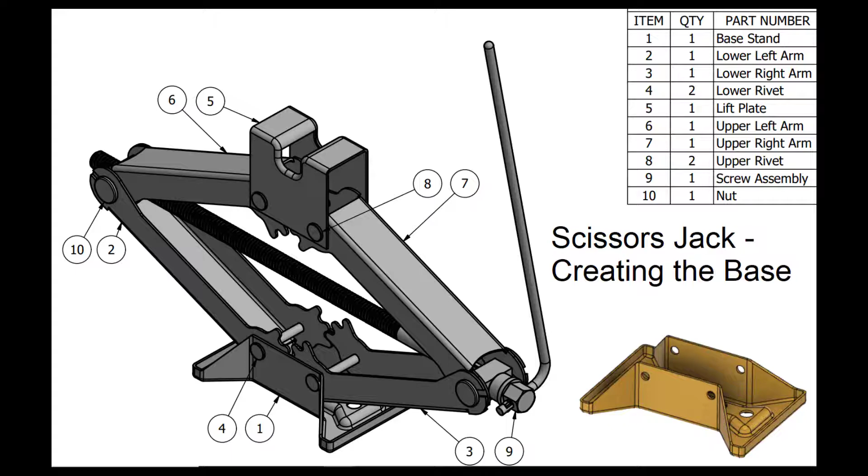In this lab, we'll design this scissors jack, and then we will analyze how much force is required to lift up a car with our hand at, say, this position or this position or this position.

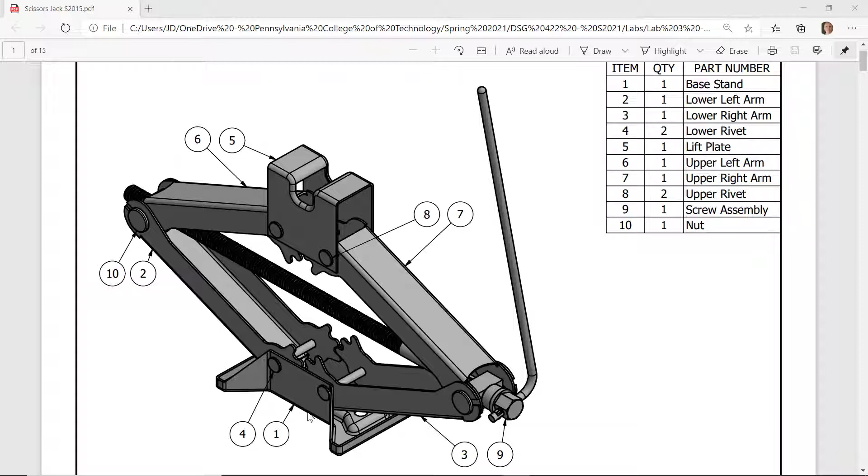The first part that we will model will be this base stand. Let's go down through the drawings and find that base stand. I see that the overall width, looking from the top, is 5 inches from here over to here, and the front to back from here to here is 3.5 inches. So let's start to set this up.

I'll go into Fusion, and the first thing I'm going to do is create a new folder, and I'm going to call that folder Scissors Jack. Then make sure that that is our active folder.

I have started a new file, and this one is also in inch units. Now, if the units bother you, it's really a good idea to become fluent in using any units. There may be some locations in the world where they never see inch units, but I tend to go back and forth between inch and metric units pretty fluently. So I'm going to change the units on this, and once we change the units, it's just the numbers anyway.

Be careful about your units. Now, you may also want to change the orientation of the Z-axis, particularly for 3D printing. I'm not sure what good a 3D printed scissors jack would do, but anyway, just to demonstrate, I'm going to go to this view cube on the front view, and I'm going to set that as the top view. Then I'll go around, so now Z is pointing up. It doesn't really matter, just a demonstration of how to do that.

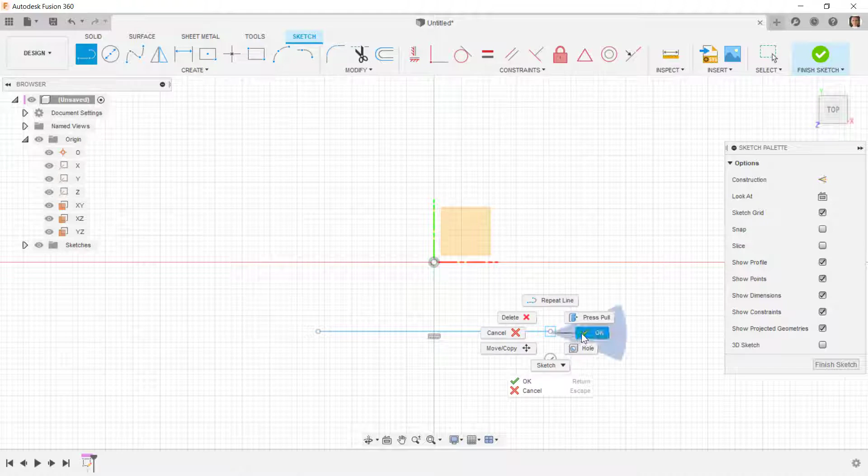I'm going to go to the top view, and I'll do a new sketch on this plane. I'm going to draw a couple of construction lines, and I'll put these in space initially. I'll change those to construction. Then I'm going to do a midpoint constraint between this line and the origin, and a midpoint between this line and the origin. So the first thing I do when I'm designing a new part is I try to find symmetry within that part.

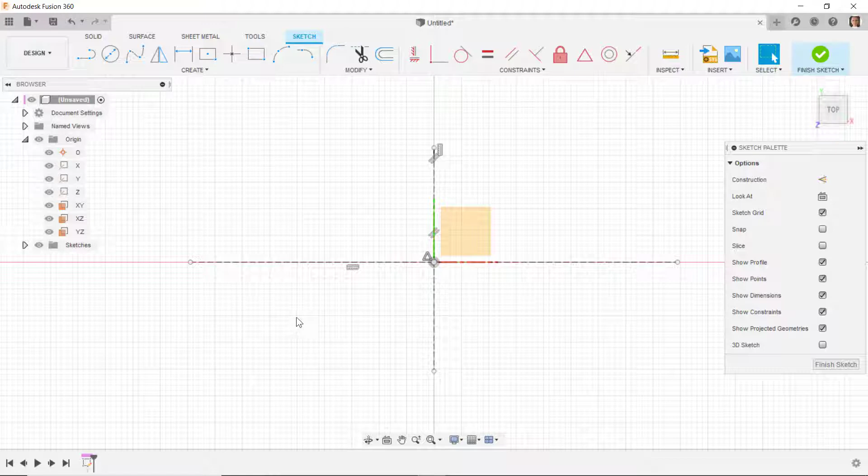There are a couple of different ways that we could have done this, this is just one way. I'm going to do a rectangle, and put this rectangle out in space, and I want all of that to be construction, or at least this line and this line to be construction as well.

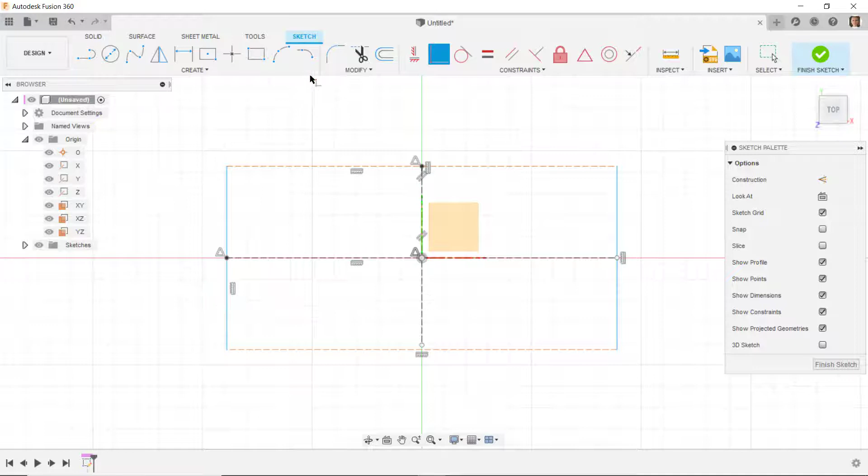I'll select those and hit X on the keyboard, and then I'm going to do coincident - this point, and then the midpoint of that line, and coincident this point to the midpoint of this line. I'll put in those two overall dimensions that we looked at, so this distance is 5, and this distance from here to here is 3.5.

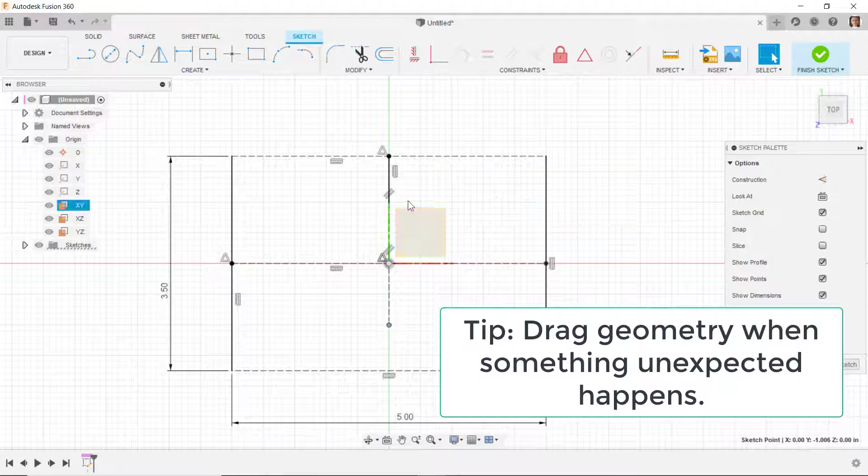I see that this point is unconstrained, so I'll get this point to this line, and it actually doesn't want me to do that. I'll just try to - and I probably accidentally got 2 lines in here, so be careful about that. I have an extra line that I had somehow gotten into my sketch.

I'll put a link to the drawings, and try to go by the drawings to model this on your own, and then go back and look at how I did it. So I did 5 inches this way, 3.5 inches this way.

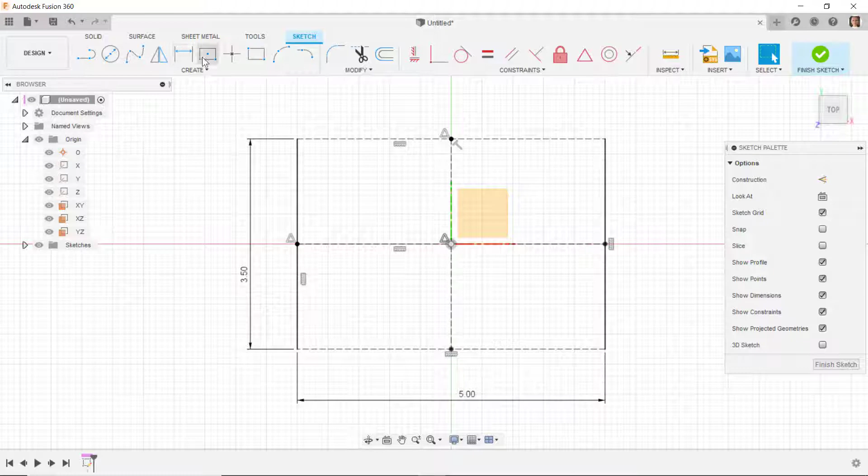I think what I'll do is put a rectangle here in the middle, and I could use a center point rectangle, but I'm going to do it this way, and I might purposely offset the center of that. I'll do coincident between this line and the midpoint of this line, and coincident between this line and the midpoint of that line. I'm looking for symmetry within my model, and I'll change this to construction, and this to construction.

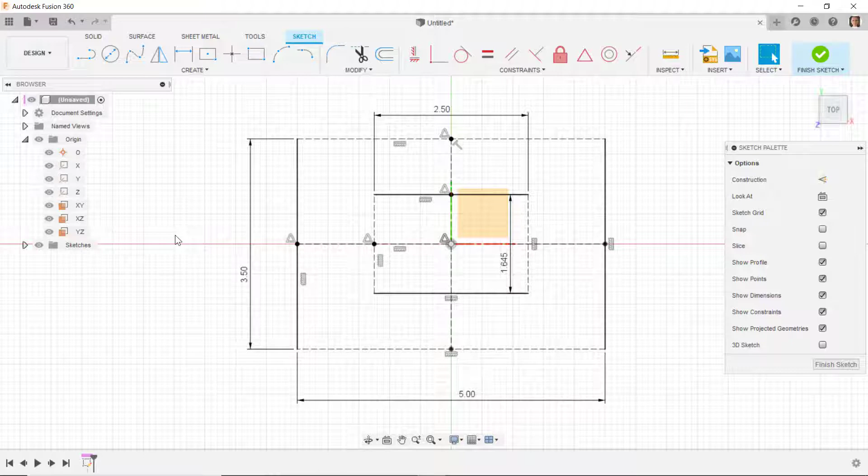I'm then going to create a line, and I'm trying to decide how I want to do this, but I'm going to create a line from here and then from here to here, and I'll also do it down here and then from here to here. We could mirror these from this side to this side and to the other side, so let's do that instead.

Let's go ahead and put a dimension on here. I'll dimension the distance from here to here as 0.375. We see that that geometry is fully defined, and so then we can just do a mirror of this line. I might have trouble getting the shorter line.

So if I do a long left click, then I get a select other, and I can select this second line, and then the mirror line is about this line. Okay, so now I have that constrained.

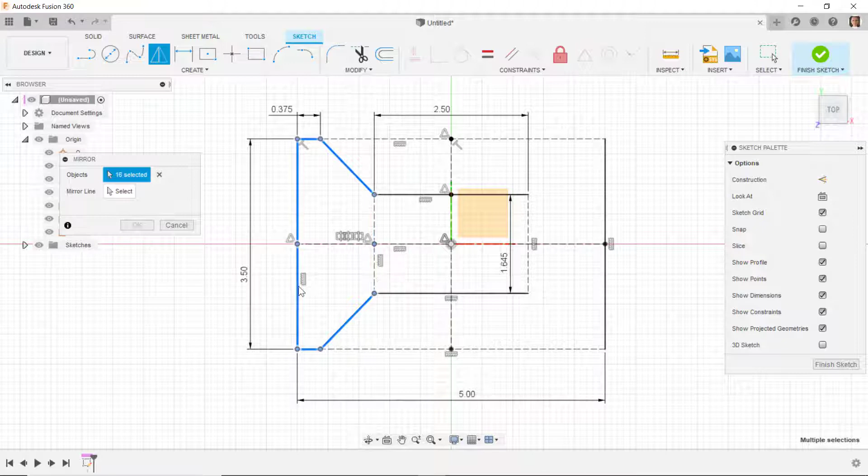I'll do create mirror. Now I might put a window around this, but that would also get this line and this line, which I don't want to duplicate. So I'll hold down the control key and unselect these two lines so that it doesn't mirror those, and I'll mirror that to the other side. So be careful about avoiding the duplication of geometry.

Alright, I'm going to finish this sketch, and I'm going to rotate around a bit, and then I want to do a sketch on this face. So I'll do a sketch and I'll do it on that face.

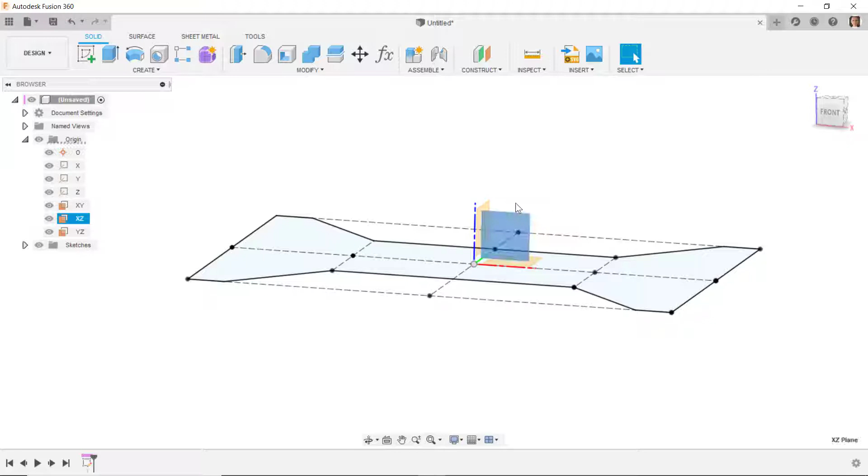Now there's a setting somewhere in your preferences to keep it from rotating around. I prefer to work in 3D, so I don't want this rotating around looking directly at that plane. Some people prefer though that it rotates around. You can set that in your preferences. I don't remember where it is exactly, but somewhere in there in your preferences.

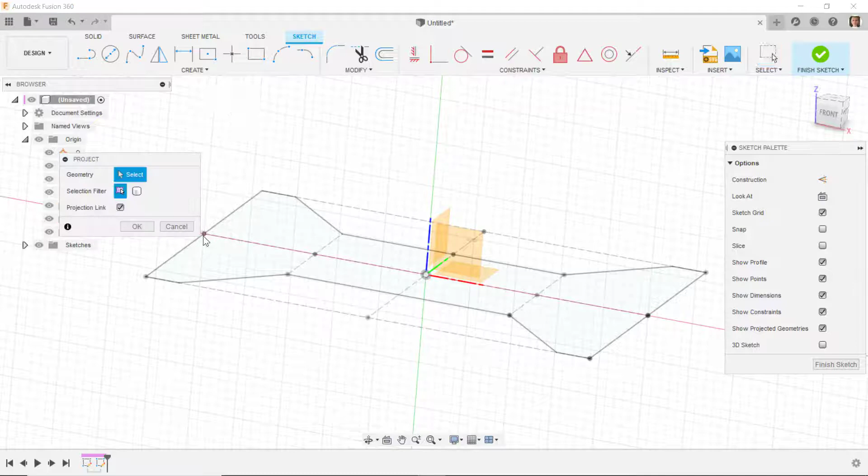So I'll do P for project, and I'll get this point, and I'll get this point, and I'll say OK to that. I'm going to temporarily hide sketch number 1, and I will draw a 2-point rectangle from this corner over to about here, and then I'll drag it to that corner, so that length is fully defined.

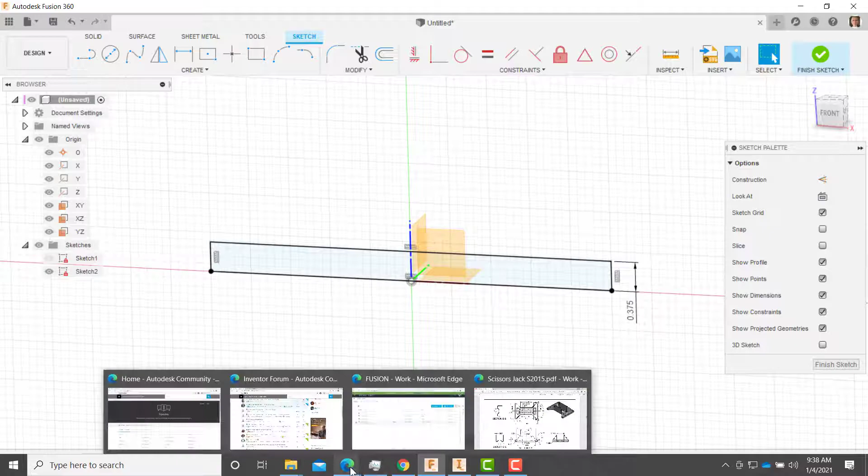And then I'll dimension the height of this as 0.375, and follow along on the drawings to see where I'm getting this dimension. So here's a 0.375, and I'll put in these other sketch elements.

One thing that people will ask me is they'll say, just give me the model. I want the model to do the analysis. But I find that a lot of people don't really know how to model, and so I want to make sure that we know how to model geometry. The analysis doesn't really mean a whole lot if we can't model the geometry.

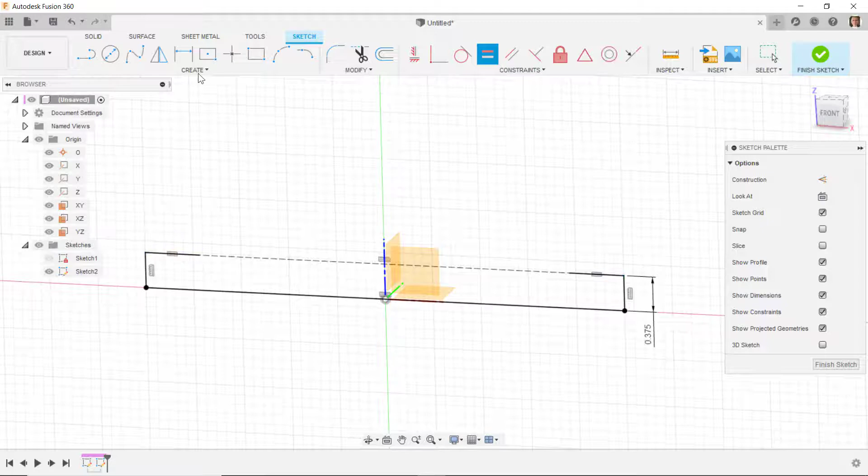I will then draw a line from here over to here, and I'll do the same thing from here over to here, and I'll make these two lines equal. Again, I have trouble getting those two lines, and if I do a long left click, I can then get the select other, that line and this line. I want those to be equal, and I'll dimension this distance from here to here as 4.25.

I'm going to put a vertical line here, and I'll change that to construction, so X on the keyboard, and I'll put a horizontal line above this vertical line. I see a lot of people will make this as two separate lines. If you have a continuous line, make it as one piece of geometry.

And I'll do coincident this point to shift the midpoint of this line, and I will dimension the length of this line as 2.5, and I'll dimension the height from here to the base, and that distance is 1.5.

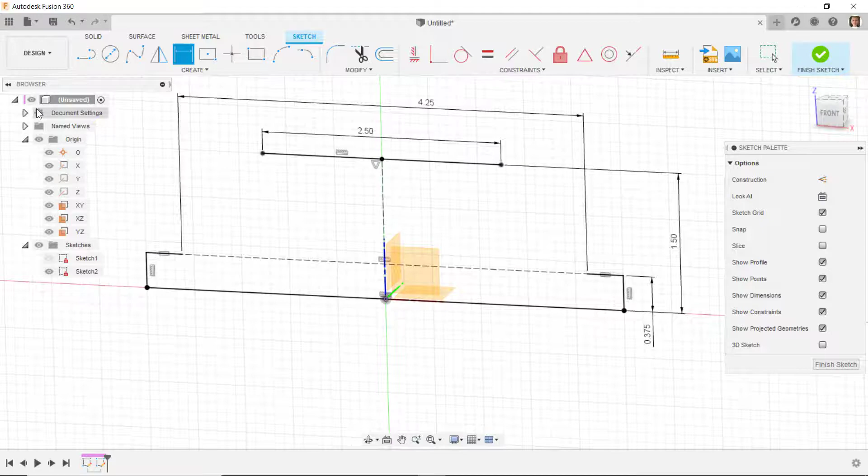So that geometry is black. And then I will draw a line from here to here, and that geometry is black. From here to here, that geometry is fully defined.

Now I could leave this sketch as it is, but I want to go ahead and put a couple of circles in here for some holes. So I'm going to draw a line, and initially I'll just put it out here in space. I'll draw a circle at each end of this line.

I'll do equal, this circle is equal to this circle. I'll dimension one of these circles as 0.25, and I'll dimension the distance between centers as 2.

And I'm going to change this line to construction, and then I want the midpoint of this line somewhere on this line. So I'll do coincident. I'll select this line, I'll hold down the shift key, I'll get the midpoint of this line. So that centers that. And then I'll drag this up, and I'll put my height of where I want this.

And so let's dimension from this line down to this line, and let's do that a distance of 1.125. Now actually I try to, when I put in or follow along on something like this, I put the dimensions in the same location that they're on the drawing.

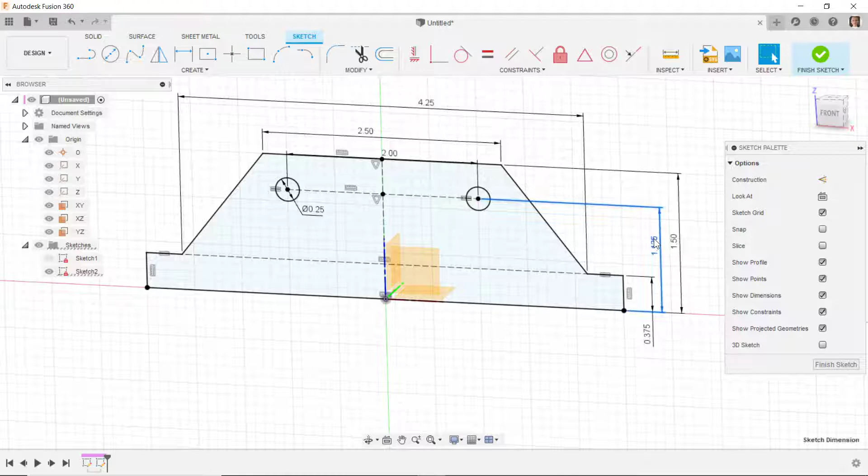So that students can follow me carefully. And so I'm going to put that over on the other side. Actually, let's just do, it'll give it a different D number, variable number, if I don't undo that. So I'll undo that, and 1.125. And so we see that that is fully defined.

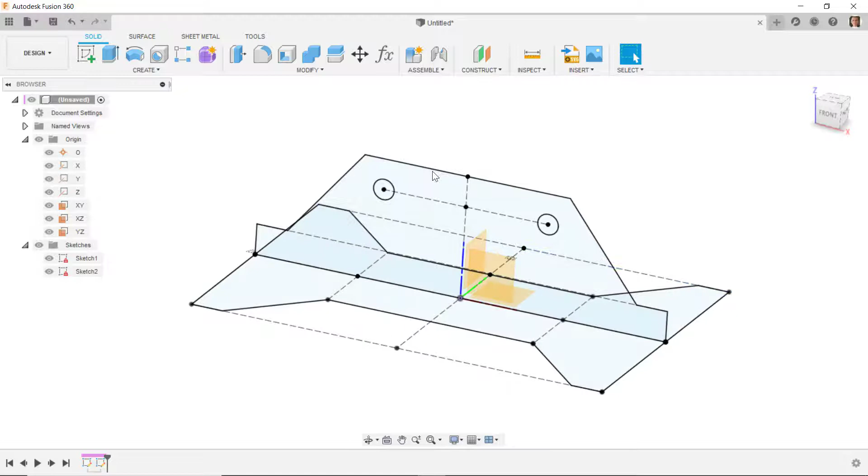Alright, I'll turn on the visibility of sketch number 1. I'm going to extrude this sketch up to the top of this sketch. So I'll do extrude, I'll select this, and I'll tell it to go to object, and I'll select the top of this. So I have that first extrusion, make that sketch visible again, and I'll do extrude.

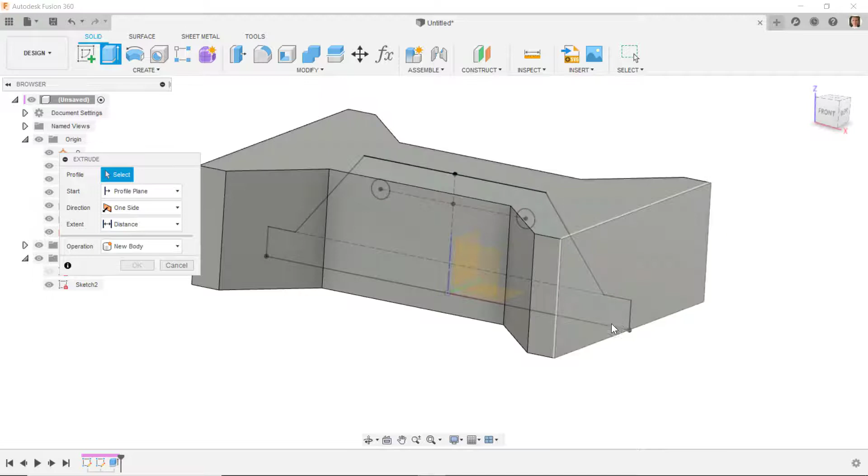You may have trouble getting that sketch down inside here. If you do that long left click, you can then get that profile. And I'm going to tell it to go symmetric through all, and I'll tell it I want the intersection between those two, so we'll say OK to that, and I'll hide that sketch.

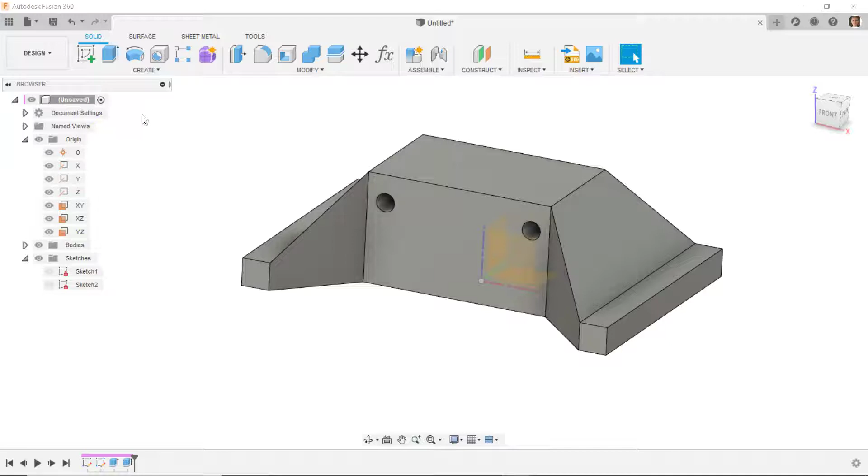Now I've gone entirely too long without saving this, so let's go ahead and save this, and I'll call this scissors jack.

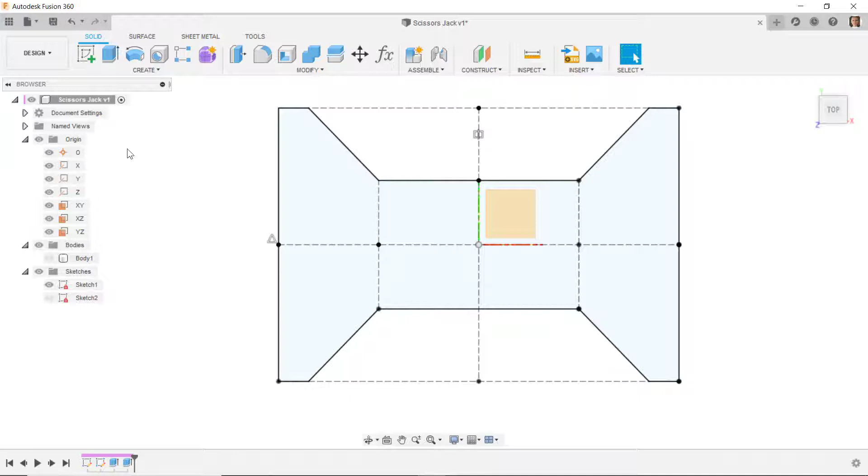I'm going to go to the top view, and I am really irritated with myself that I didn't create this as a new component to start with, but we will convert this body to a new component. I'm going to hide that body for a moment, turn on the visibility of sketch number 1, and create a new sketch on the XY plane, then project geometry for this center line and this center line.

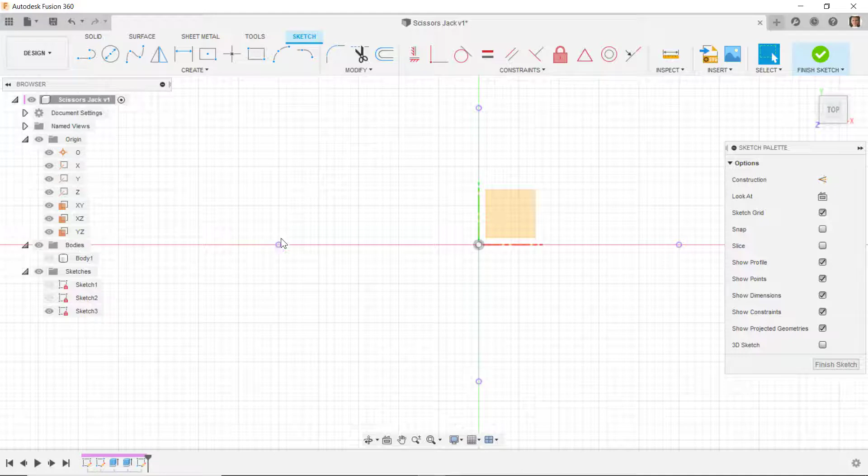I'll hide sketch 1. I prefer to change these to construction, but it's not critical. Then I'm going to draw a rectangle and put it about like this. Again, I could have used a center point rectangle. I'm going to make this line coincident to shift the midpoint of this line, and coincident this line to shift the midpoint of this line.

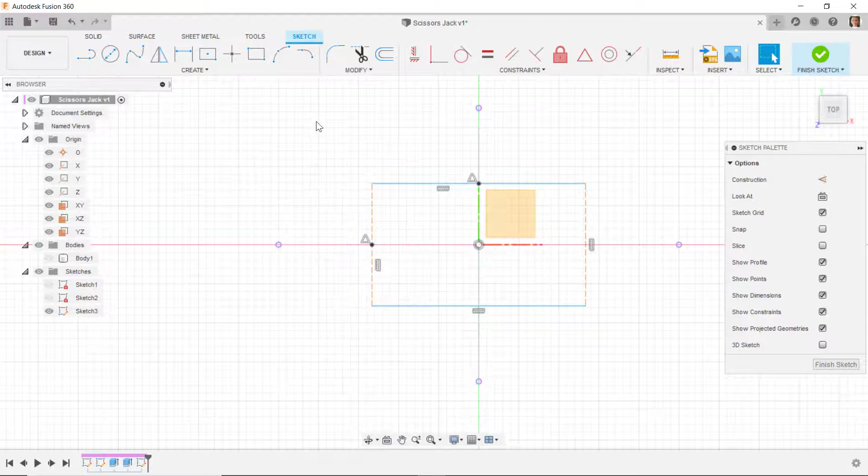I'll change these two vertical lines to construction, then draw a line over on this side, 1.05 in height, somewhere on this line. I'll do coincident to shift the midpoint of this line, and mirror that to the other side of this construction line. I'll dimension the overall distance from here to here as 4 inches.

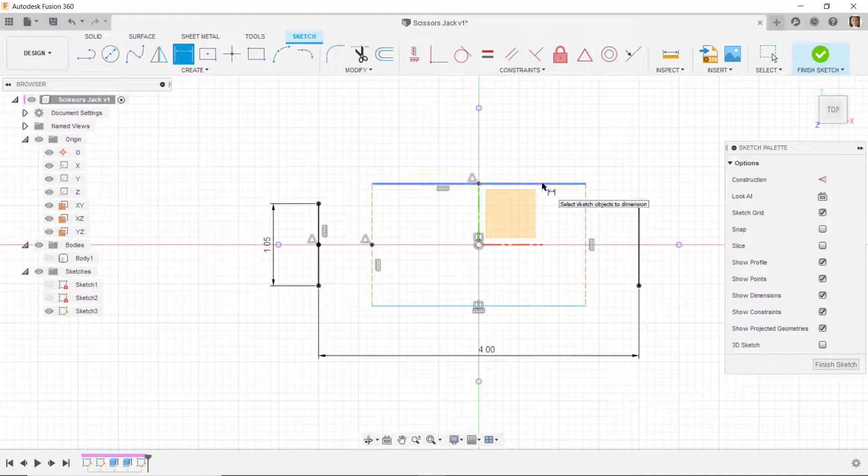When we do that, we see that these two lines are fully defined - they turn black. I'll dimension the distance from here to here as 0.75. Then I'm going to draw a line from here to here and from here to here.

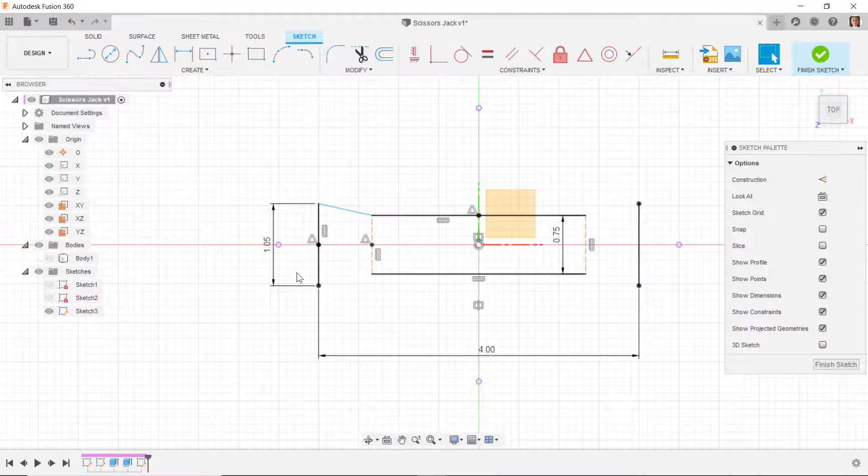We have to be careful that these lines do not become perpendicular to each other. I could do just one side and mirror it to the other, or just go ahead - I'm not sure which way is faster. It's probably just as fast to do this as to mirror. The advantage of mirroring is it ensures equal length, but because we did this symmetric here, even if I drag this, they stay symmetrical about this center line, so that works out okay for us.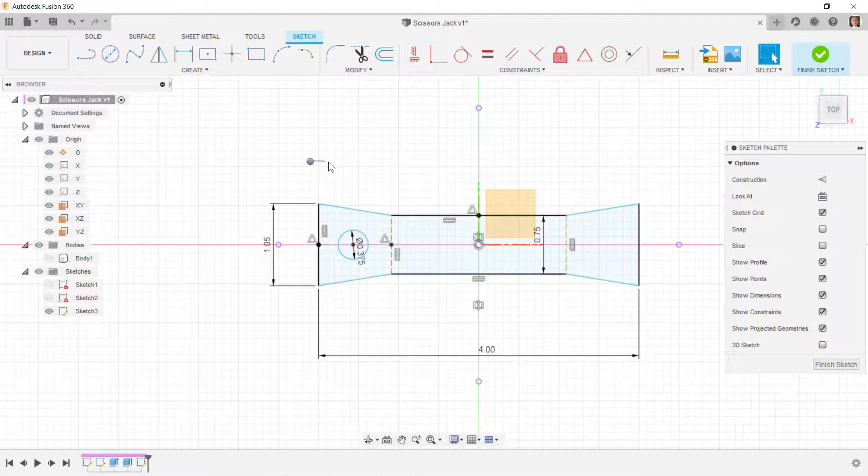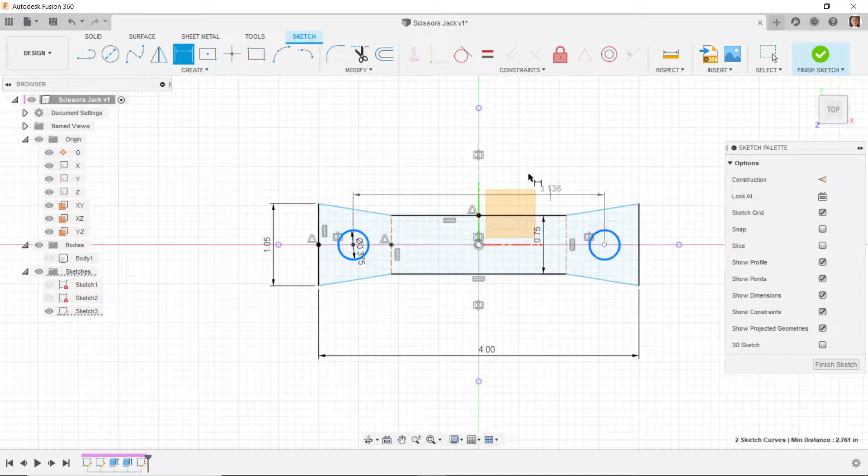Then I'm going to draw a circle somewhere on this line, as 0.375, and mirror this one to the other side. I have a mirror command up here since I use it quite a bit. I'll select this circle and mirror it to the other side of the line of symmetry, then dimension the distance from this circle to this circle as 3.25. Refer to the drawing to see where I am getting these dimensions from.

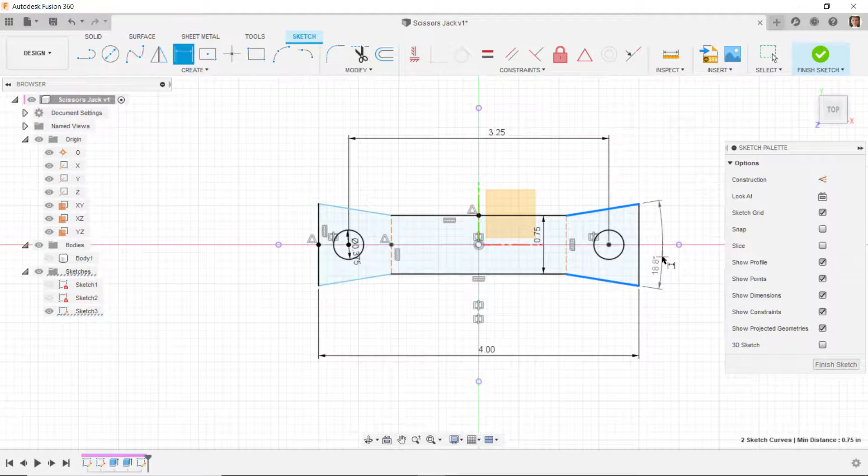Now I just realized I had put the wrong dimension over here on this line, so I'm going to delete that dimension. Where I wanted that dimension is from here to here, and I need to put an angle between this line and this line of 62 degrees. Refer to the drawing as I sketch out this geometry - you should have right away been hitting your keyboard, hollering at me, telling me I'm doing it wrong, loud enough that I could hear you from wherever you are in the world.

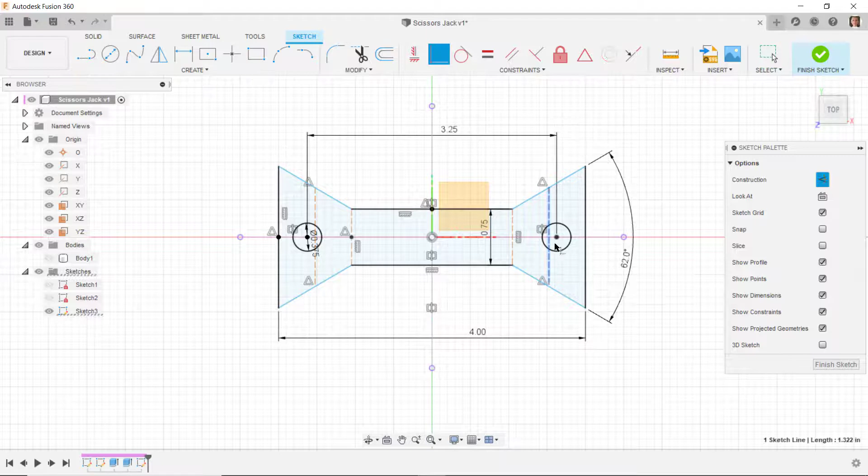I'm going to draw a line - I don't necessarily need this line, but I'll put it in for visual purposes - from the midpoint of this to the midpoint of this line. I'll do the same thing over here, although I don't really need it in two places. I'm going to change those two lines to construction lines by selecting them and hitting X, then make one of these lines coincident to the center of one of these holes.

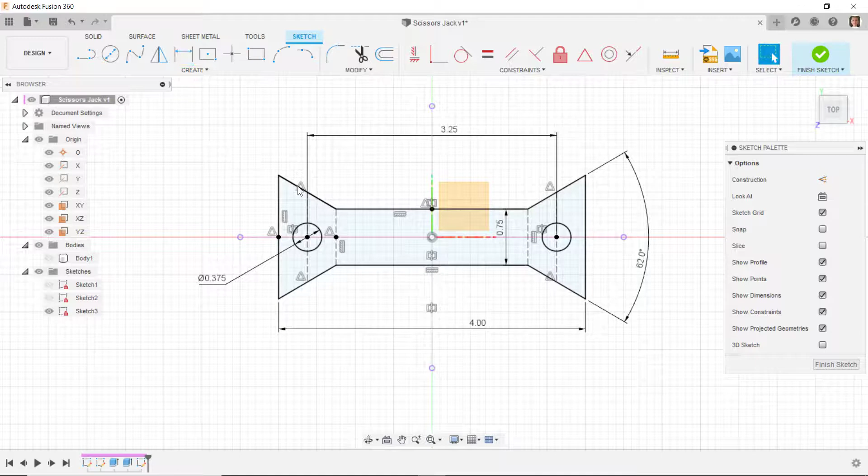When I do that, all of this geometry turns black, and I don't even have a dimension from here to here. If I dimension that line and see what it is, it comes in a different dimension than what I have on my drawing. So I need to figure out what is different compared to my original. I'll assume I don't want it at the midpoints of these two lines - I hit the wrong one, I want it on the angled lines. So I'll delete those midpoint constraints. These are the kinds of mistakes you might make as you're modeling something, and you don't have to start over - you can just edit what you have and fix the mistake.

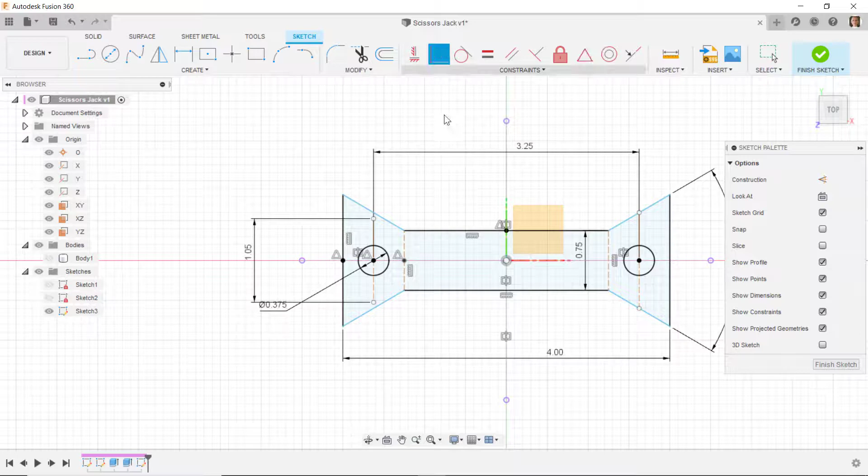So I'll do 1.05, and then I see that I have white dots here, so when I remove those midpoints it didn't retain the coincidence. So I'll do midpoint this line to that point, and then I'll do coincident this point to this line, and this point to this line. Now we see that it all turns black, except that I still have some unconstrained geometry over here.

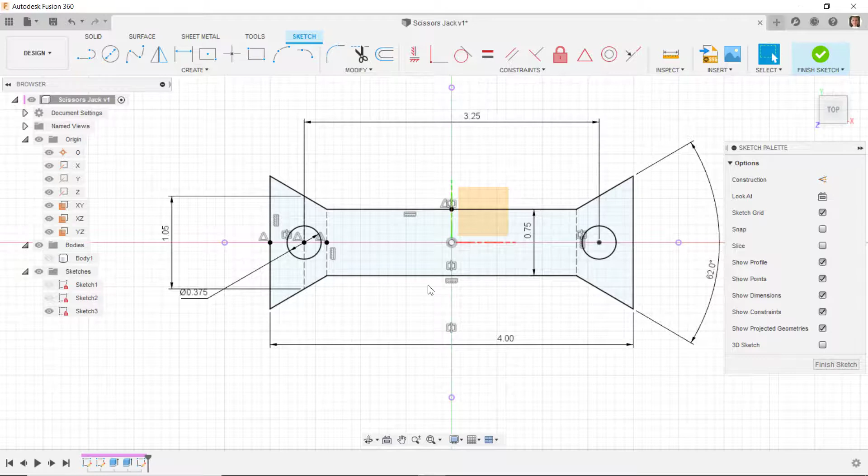So let's make sure we get rid of these white dots. Everything is not fully constrained, and this line is not constrained somewhere, so we need to put a vertical constraint on that line. So we drag the geometry and see where it is not fully constrained. Again, I said we didn't really need this line - see, this was already fully constrained before I put that constraint on that line, so we didn't really need it.

With our symmetry, everything is fully defined. I'll turn the visibility of the body back on again, and I'm going to do an extrude, and I want to get the whole area too, so I'll get all three of those areas. For the distance, I'm going to go 0.25 and make sure that it's on cut, and so we cut this cavity down into here.

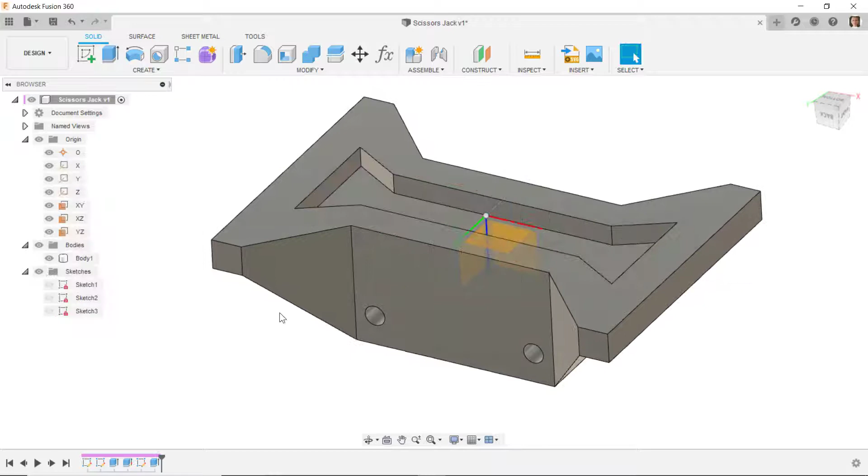I'll turn off this origin geometry for a few minutes, and then I'm going to do a fillet in all of the vertical edges of 0.125. I'm going to see if I can select this and get them all at the same time. So I'll go to fillets, go to my selection filters, do select edge priority, and then do a crossing window across here, and that got only the vertical edges.

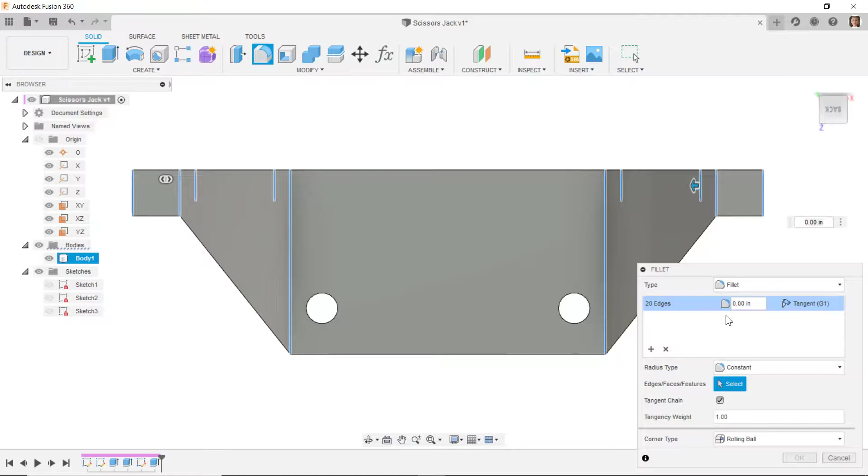Now I avoided this edge, so that's why I made my window fairly narrow up here to avoid this edge along the bottom of this slot, and I'll change that to 0.125. Now if you have trouble doing that, you can just go around and select each one of those edges manually.

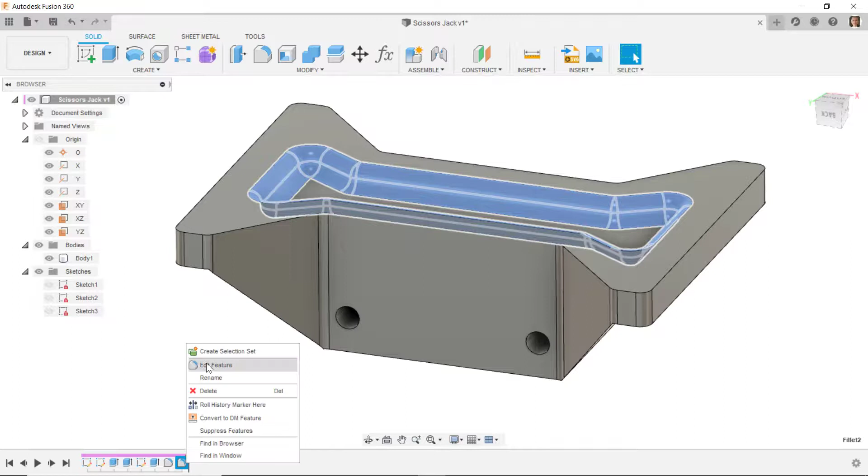I'm then going to do another fillet, and I'll select this loop and this loop of edges, and I'll do those as 0.125. I'll go back and edit this previous fillet, and I'll get this loop of edges. So I'll hold down the control key and add this loop group of edges to the fillet selection, and I'll also hold down control and get this edge and this edge right here, so we've added those fillets.

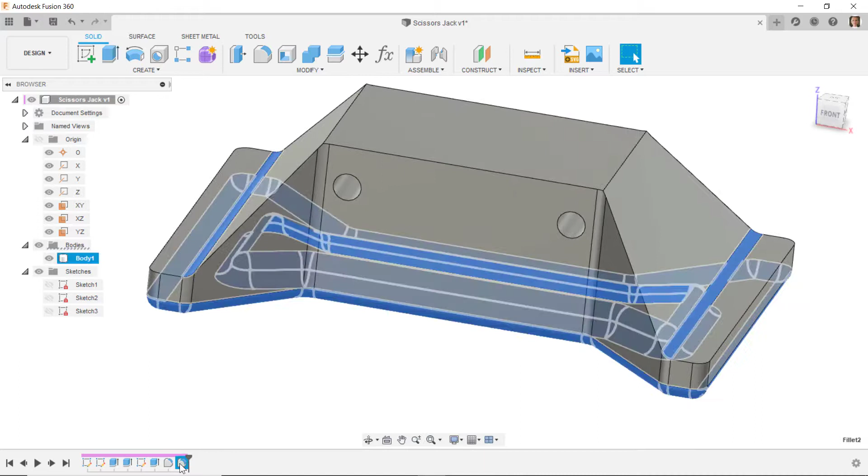Now I'd also like to fillet this edge and this edge up here. I've had trouble in the past if I add those two fillets now, so we could give it a try - it may or may not work. If it doesn't work, we can go back and do those in a different order. So let's edit this feature, and I'll select this edge and this edge with the control key, and so I put those two fillets in.

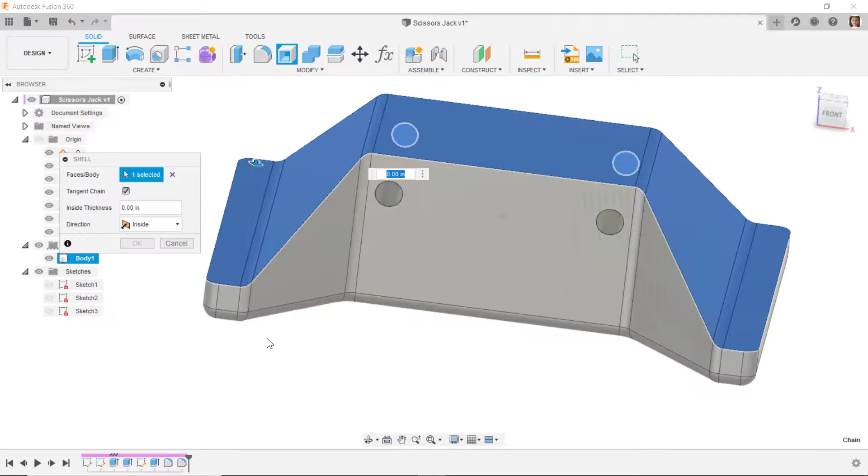Then I'm going to do shell, and I'm going to select this top face, and with tangent chain on, it'll chain those faces. I'll also select this hole and this hole, and put that thickness as 0.0625. Now it says it couldn't do that, so we'll undo back to where we put these two fillets on.

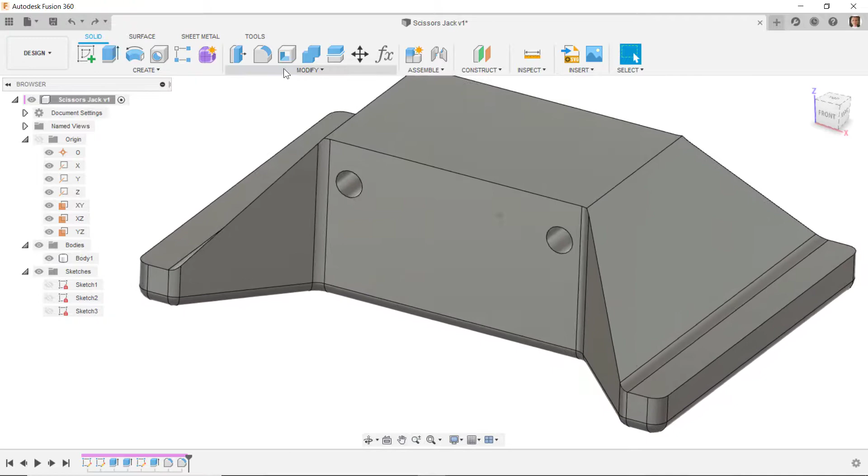So I'm going to undo, and I'll try doing that shell again. I'll do shell, and select this face and this face and this one, these two holes, and we'll try that shell again. And so in that order, it works. So you have to be willing to try different orders of operations when something doesn't work as expected.

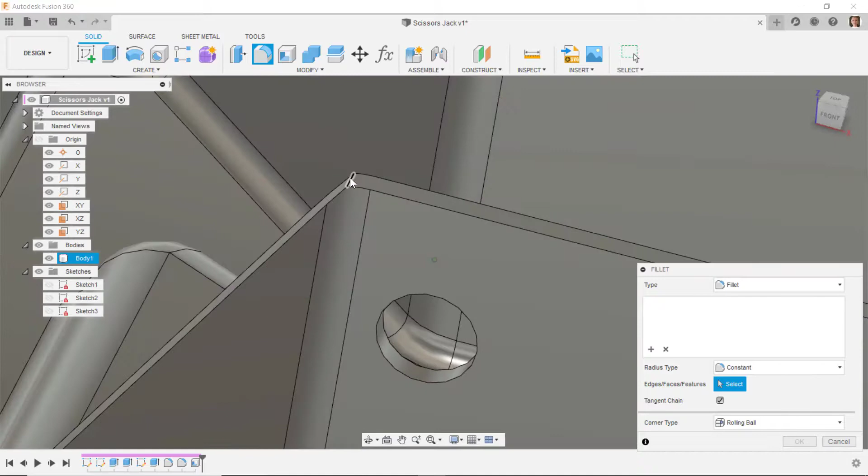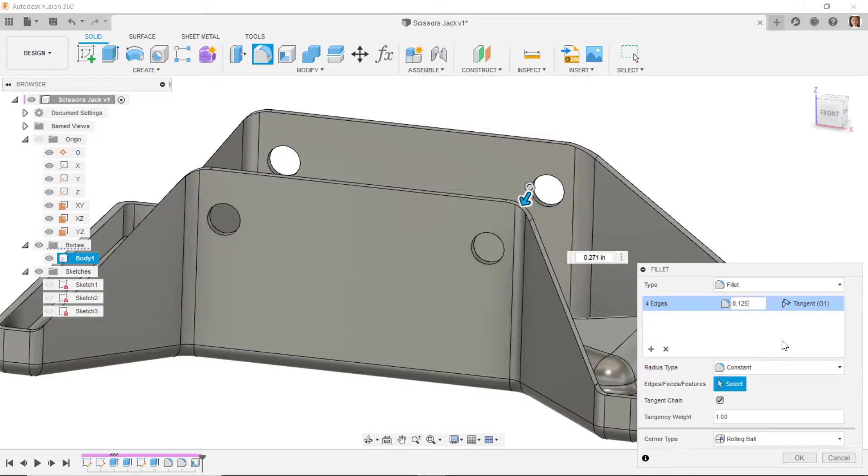Then I can try putting this shell or the fillets on here again. So I'll select these four corners, and let's drag that down - I'm trying to decide how big I want to make those. Let's try 0.125, but I think I'm going to make them 0.25. Now I'll leave it at 0.125.

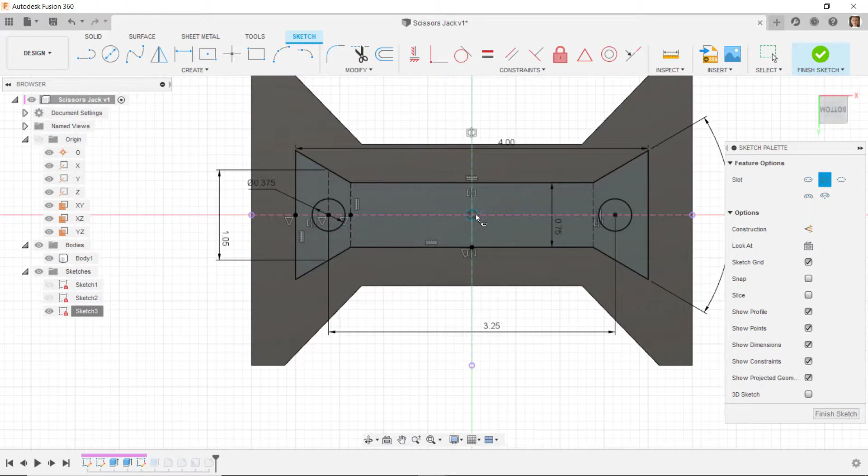Then I want to put some holes in the bottom of this part. Let's go back to our sketch number 3, and I'm going to edit that sketch, and add some additional geometry to this sketch - we'll do a slot, a center point slot. I'll select the origin as my first point, come out some distance, and put that slot. I'll dimension the distance from center to center as 1.5, and dimension the height of that slot from side to side as 0.5.

Okay, I'll make that sketch visible, and then I'm going to do an extrude, and I'll select this circle, this slot, and this circle, and tell it to go through all. We'll say okay to that. We'll hide our sketches.

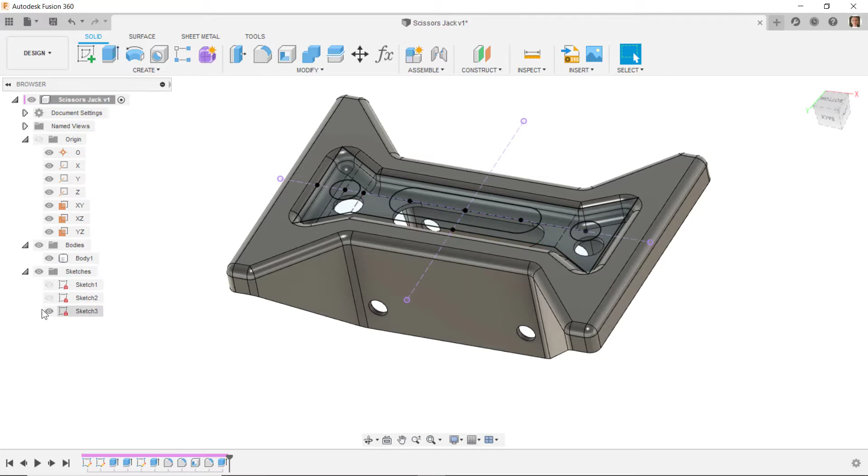And let's put a color on this. So I'll go to that body and right click, go to appearance, and you could set whatever color that you want on your part.

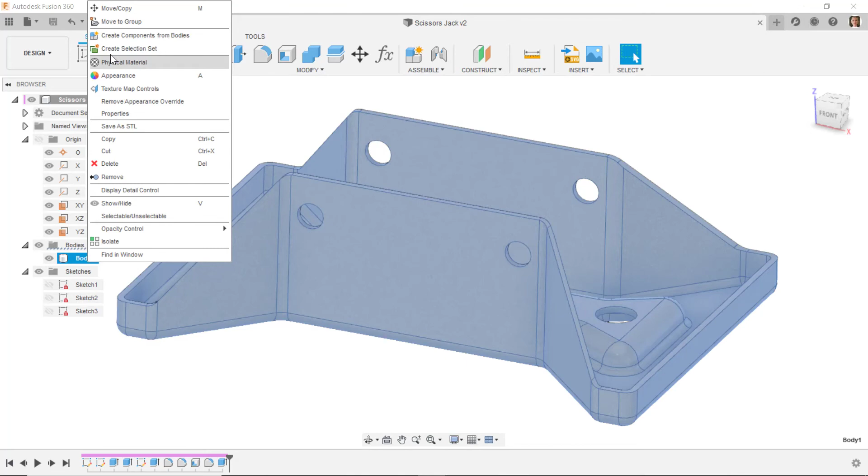Alright, let's go ahead and convert this to a component. So I'll right click and do create component, and then I'm going to give that component a name - I'm going to call that base.